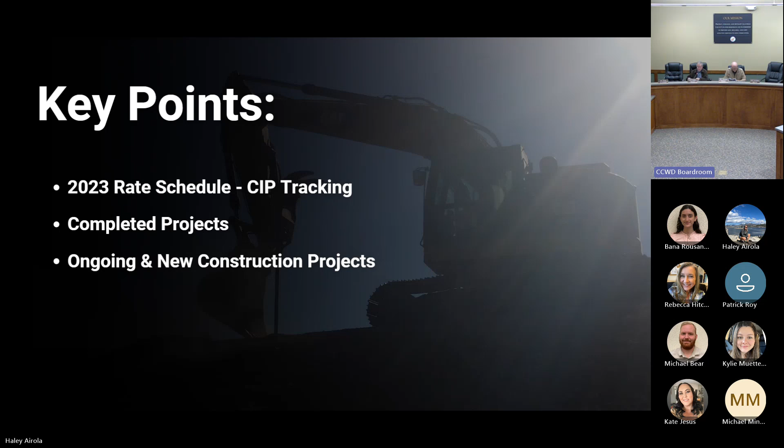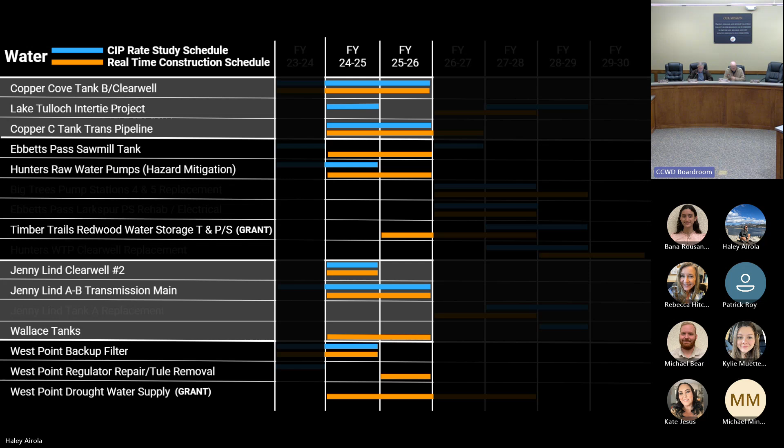And we're focusing on this last year and this upcoming year for this CIP discussion.

So then here's the projects that are in the CIP now that are finishing up. We've got the Jenny Lind Clearwell, it's scheduled to be online here in the next couple weeks. The West Point backup filter, so that's where we're at. And then the Copper Cove tank B and Clearwell are going to be nearly complete.

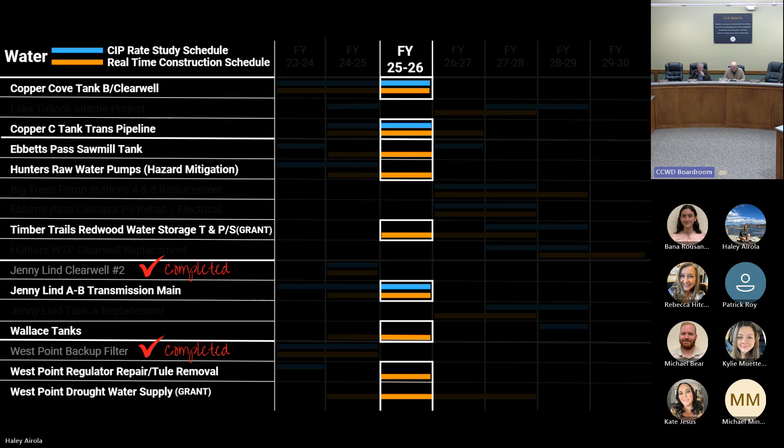So on the sewer side, we're going to compare that to what we got in the 2023 rate schedule.

So the Arnold, the reason we're behind is that we decided to try to seek a grant that became available. We're getting close to the USDA loan grant, we're working through the financials with the USDA to finalize that.

I just think we need to make a point about this, something that happens to us all the time, unfortunately, we sometimes have to shuffle a project because we know funding is going to be available for something else. This is never a 100% deal because you can't see too far in the future, but maybe you could explain that, Mike.

I was actually just going to make a comment here to slow it down a little bit, because Kevin, this is awesome, I really appreciate what you've done here. And I know we're not into dollars yet, this is just timing. But I think it really helps show, compare what the original plan was to where we're at. I also want to reiterate, this is not unusual to have this kind of change from a construction schedule from what we had started 2 years ago to where we are now.

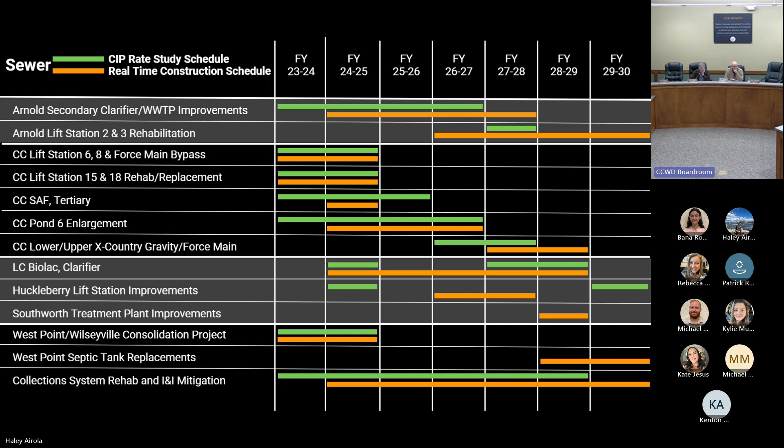So here's the projects that are in this existing fiscal year and next. You can see there's a couple projects that we completed, at the board meeting yesterday with the project completion stuff. So on the lift station project, everything's kind of moving along there.

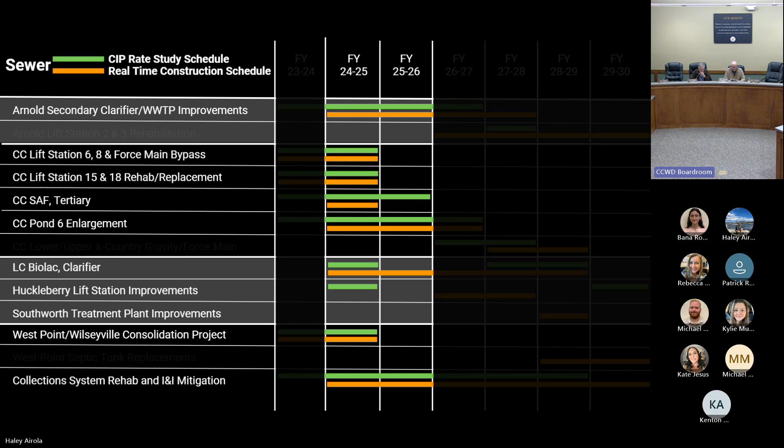So these are the West Point, Wilseyville consolidation projects. They just have a few more tasks up there, and we'll be done there also.

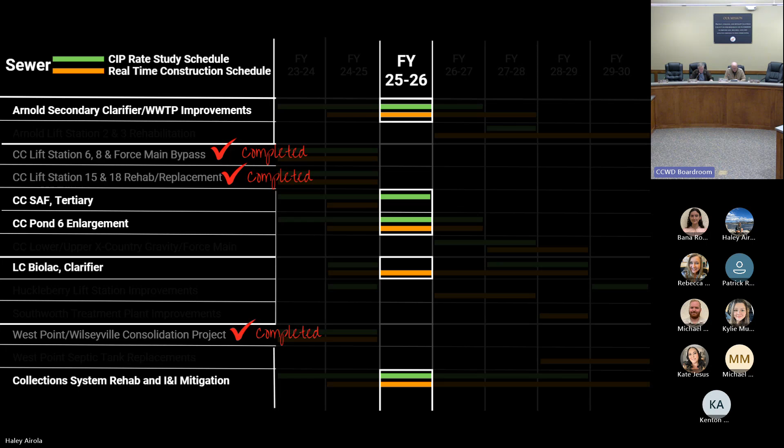So here I'm going to go through the projects to be completed in this fiscal year.

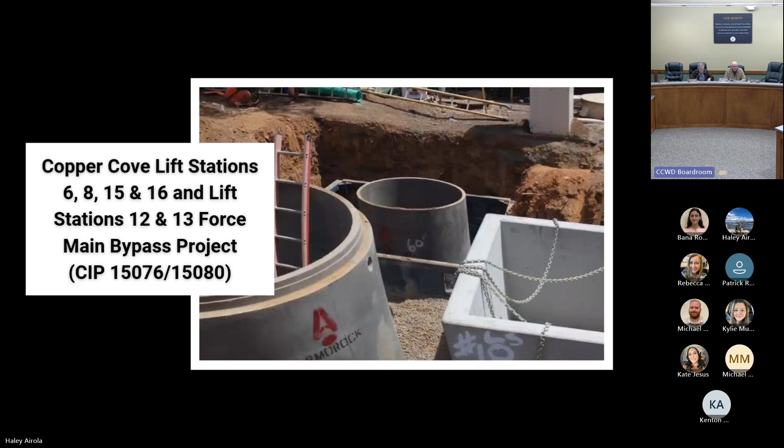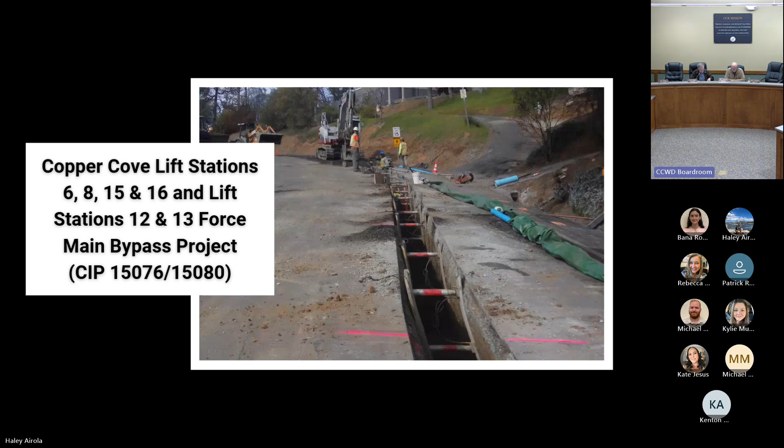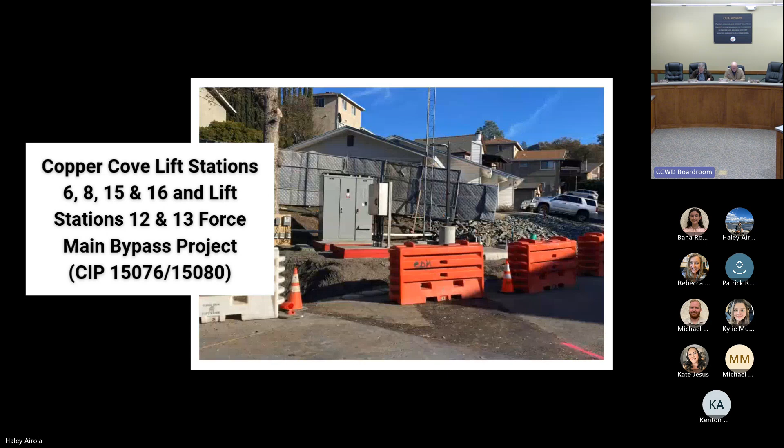So we got the Copper Cove lift station project. This is a project that we brought to the board yesterday for final acceptance. This was replacing the 4 dry can lift stations with new Armorock polymer wet wells and new submersible pumps, new electrical components, and the force main bypass. This was a really good project. It had a lot of delays in the construction process due to material deliverables, but in the end, it ended well.

This is the Jenny Lind Clearwell project. This tank's ready to go online here in the next couple of weeks. They plan on coming back next week to disinfect it, and then we'll fill it. This was a rehabilitation of the tank, and not only rehabilitation, there wasn't adequate freeboard, which is the level of the water between the roof and the water level. So if there's an earthquake, you get a sloshing effect that could damage the roof. Part of the project was to bring this up to current standards and raise the roof. So we got a new roof, floor repairs and recoating, new spiral staircase, and a new blower system to help with the disinfection byproducts.

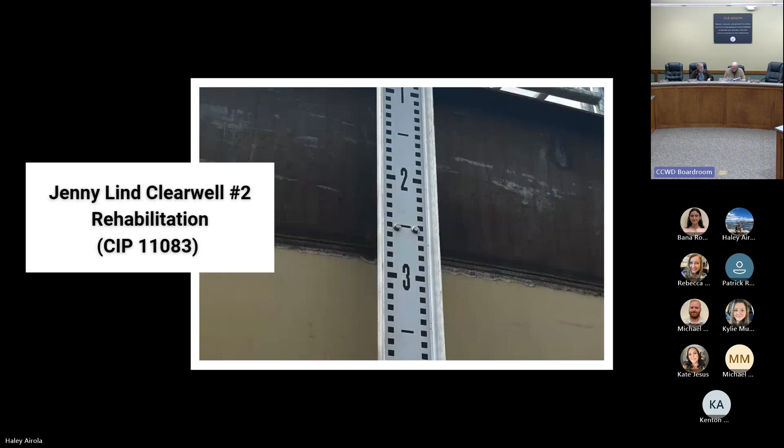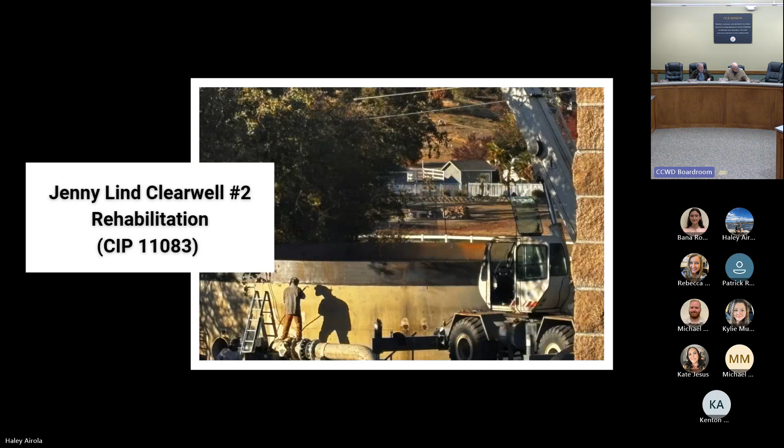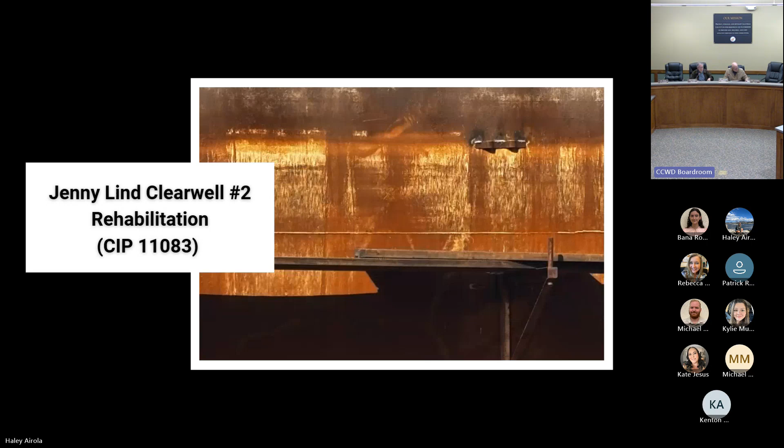Kevin, do you have 2 clearwells there? Yeah, there's one Clearwell 1 that's just next to this Clearwell, and that was rehabbed about 10 years ago. So that's similar, this tank was a similar rehab with the new roof. So we quite clearly couldn't have done this repair unless you had an existing side-by-side clearwell. Yeah, we had to do it in the non-peak season. Normally we'd like to rehab these tanks in the summertime when there's nice weather, but because demand's high in the summertime, we could only take this tank out of service between November and May.

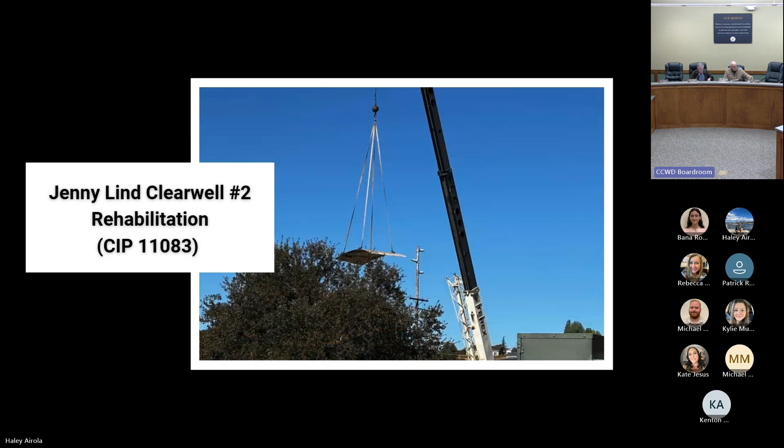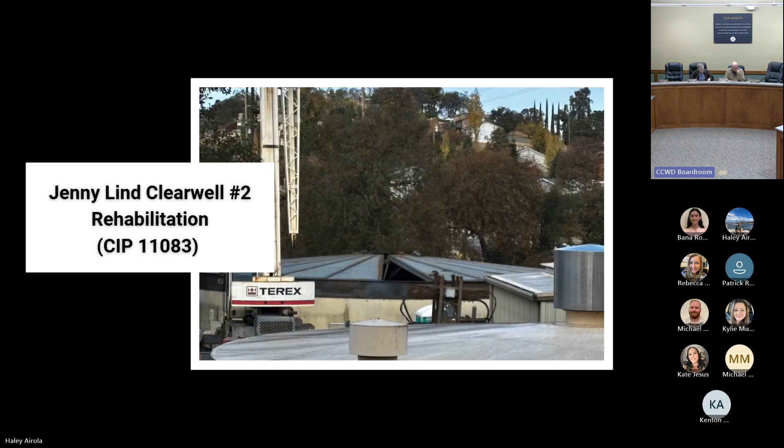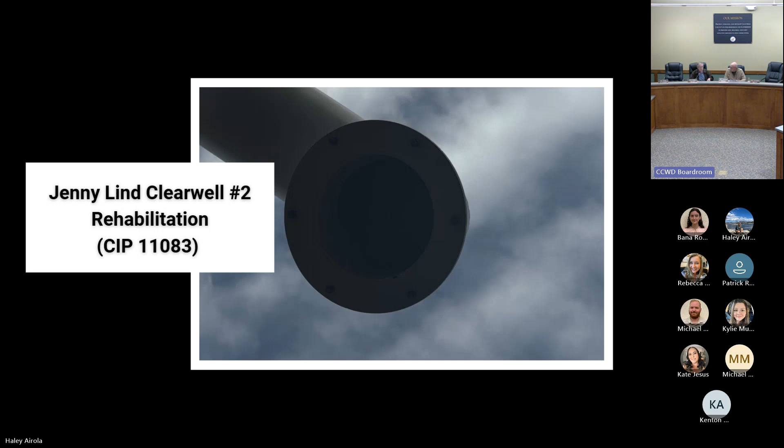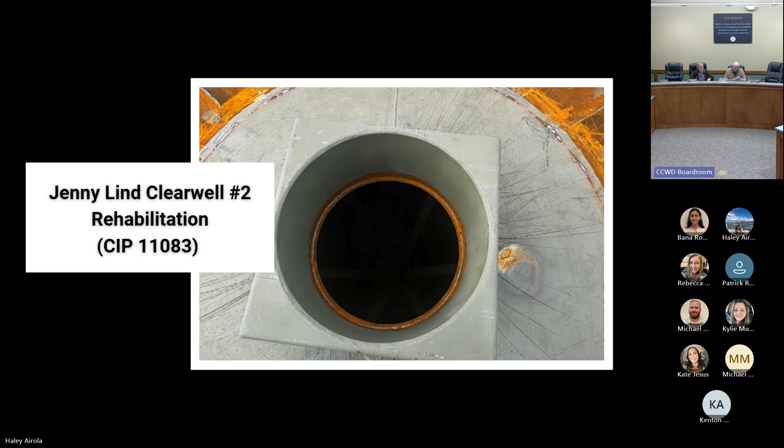So there's a couple different projects within that project. Right now we're procuring the DAF unit, which is a pretreatment. We need that in order to dewater the pond in order to start construction. So the first stage is to get the DAF unit, which gets the algae out of the water so that we can treat it up. It could double the capacity of our existing tertiary treatment plant by just being able to pre-treat so the algae doesn't clog up the filters. Also with that, we'll have to do a filter rehab on the existing filter along with that DAF upgrade. The second phase is increasing the capacity, the enlargement of the dam or the pond. The third phase is the tertiary treatment upgrades, which is new filters at the treatment plant and a new UV, so that we can get enough capacity through there to maximize the treatment process.

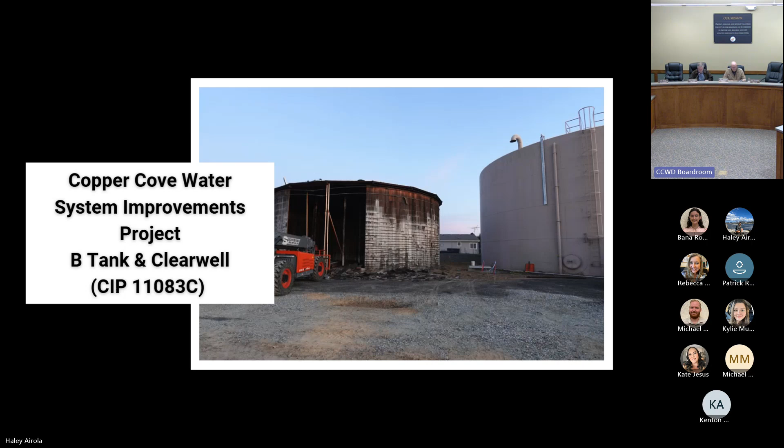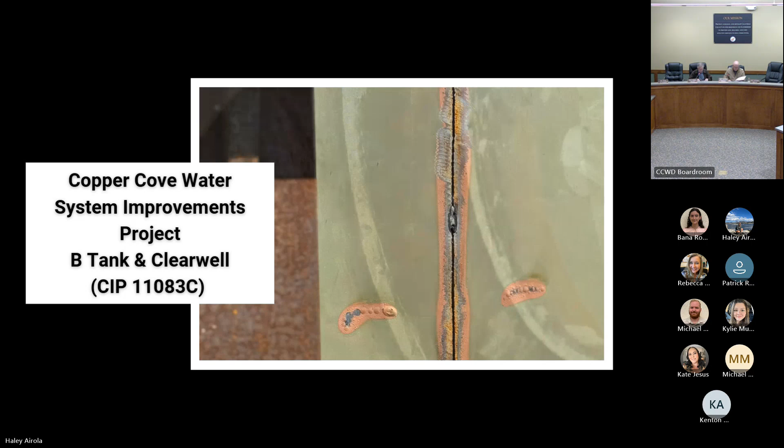The next project is our Copper Cove water system. This is a B tank. We had a redwood tank there that we took down and put a new steel tank in, and it's constructed online. The other tank, we lowered the roof to match the new tank level and rehabbed it. That should be ready to go online here in the next month. Then the clearwell, next week we're putting the first new clearwell online down at the water treatment plant. That'll be online the 19th, I believe. Then we'll dive into the existing clearwell to rehab that one. This should be done close to the end of the fiscal year, maybe a little bit into the next fiscal year.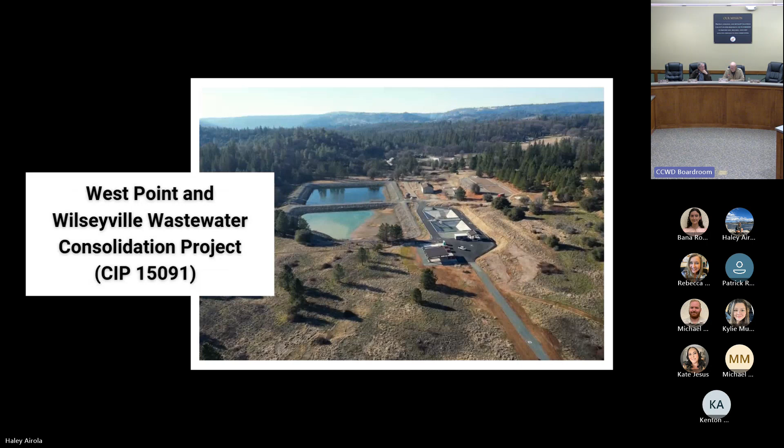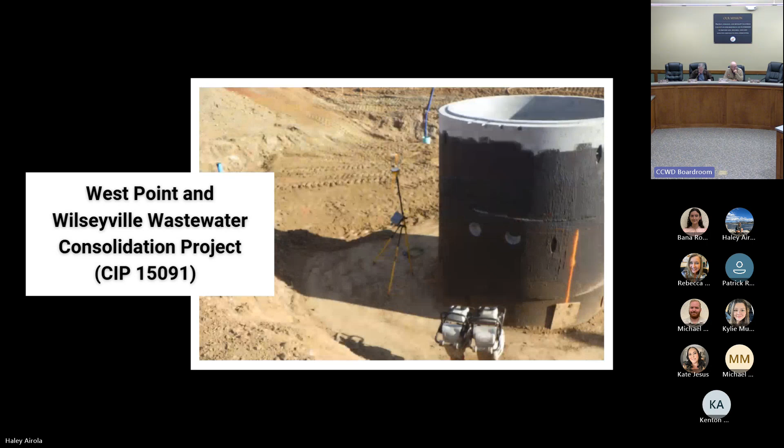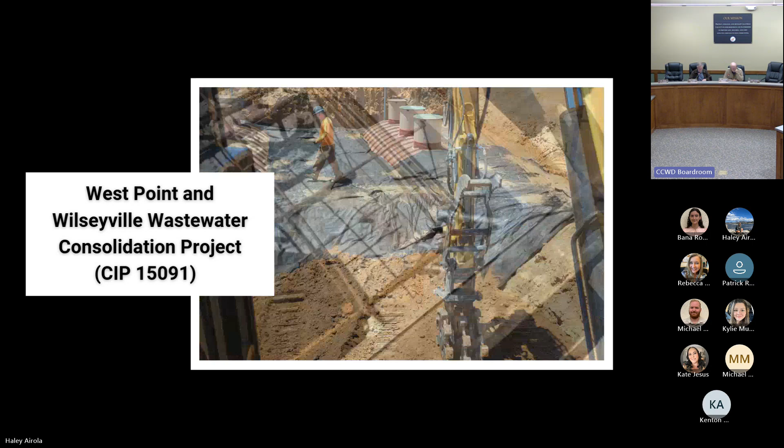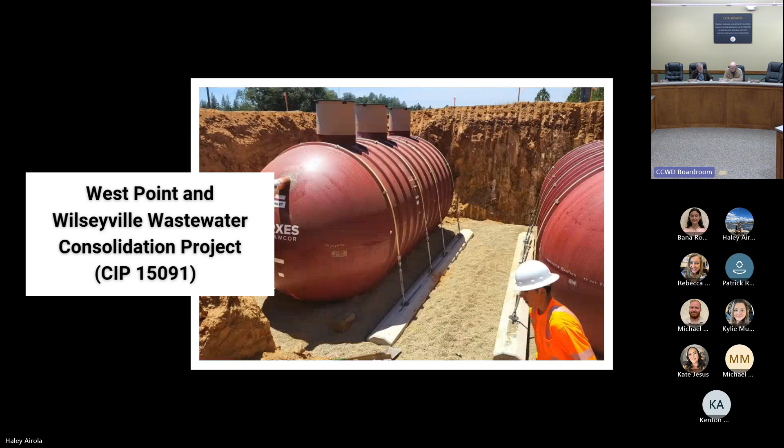So we got the West Point, Wilseyville consolidation project. This one also had some delays with electrical components and that type of stuff. They're pretty well done with the entire project except for the electrical equipment that just showed up last week. We're trying to get that installed, and then they'll go clean out the old Wilseyville pond. They'll de-water and take all the solids off site, and they'll send us the water through the new septic tanks here. That consolidates and eliminates one of our wastewater treatment plants, which is really good for permitting and that type of stuff. It was all grant funded, disadvantaged community, state water funds.

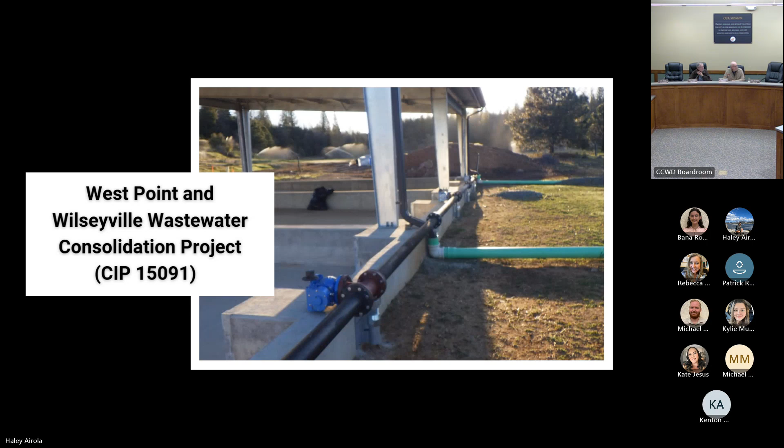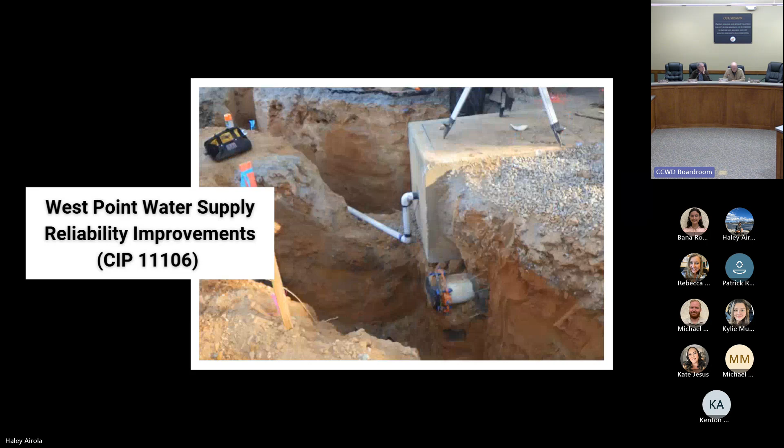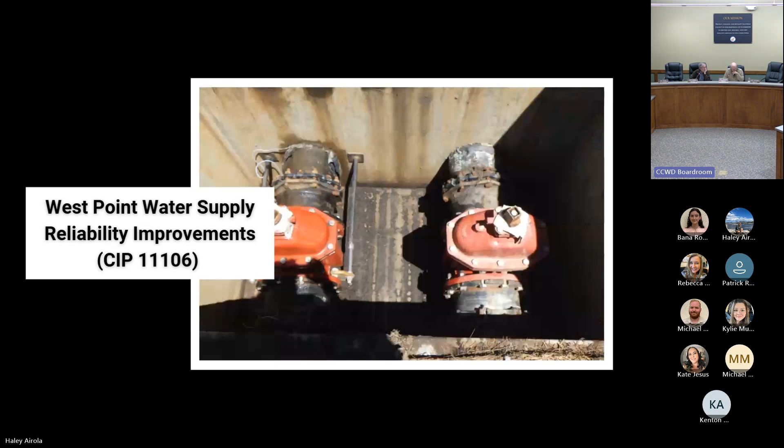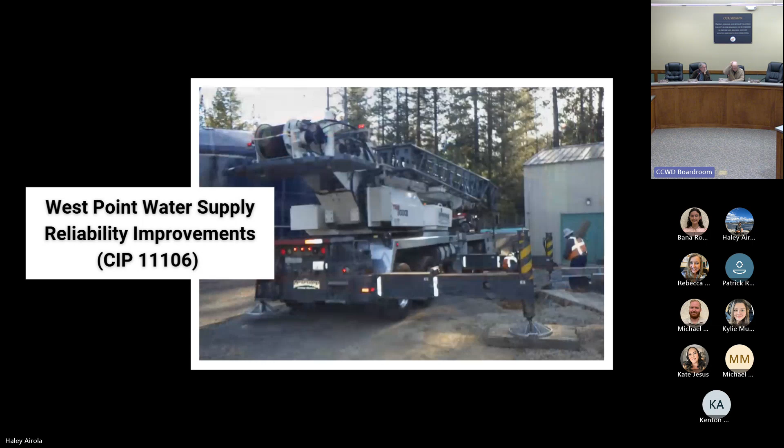So this project here is the water supply reliability improvement. This is the secondary filter at the West Point water treatment plant. Before this project, we only had one filter there, so there was no way to do any service or maintenance on it. Now we've got a second filter with all the high-tech equipment involved, and a new building for it to be inside of. It's a really great project, also funded in part by grant funds from the IRWM.

So there, KW Emerson is pretty well done. They just have some old tank that they have to take out and a couple of repair items in the buildings.

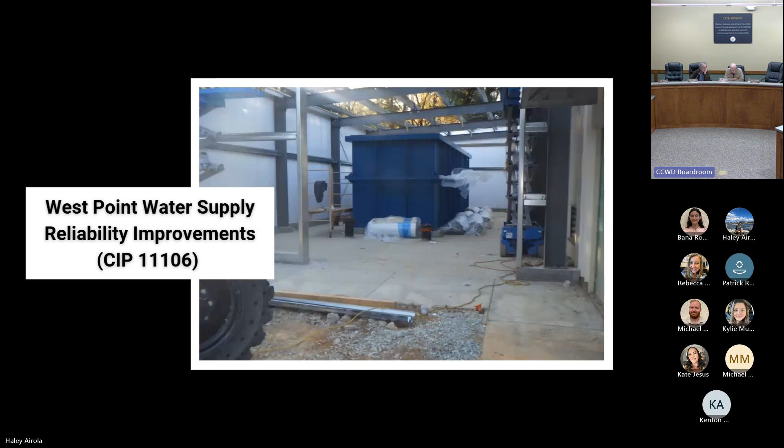So the AMI project, this one's been ongoing. I think they were substantially complete over a year ago, but we've just been trying to work out the final process of the project, and also there was available grant funds left over. So we got permission to close out the construction project and not lose the grant funds. We're able to close out Mueller's portion of the project.

We'll probably bring it to the engineering committee, hopefully with the plan of using this other $1 million that we have. We already brought it before and discussed some of the flow monitoring equipment that Mueller has available. There's also Cla-Val, another company that makes the PRVs. They also have equipment that we can use to retrofit some of our PRVs with flow control equipment and pressure equipment.

It's going to really help us understand things. We can see what flows go into what zones and compare that to the consumption meters in that zone, and really dial in our system. It can control the pressure by putting pressure sensors out in the system that would control how you operate the PRV, so it can maximize performance, because the PRV just senses pressure at the PRV itself, but if you're trying to control pressure downstream in the system, it's a lot more high-tech and you can get a lot more information out of it. So there's a lot of advantage to that, and if we have grant funds for it, it could be a wise investment for us.

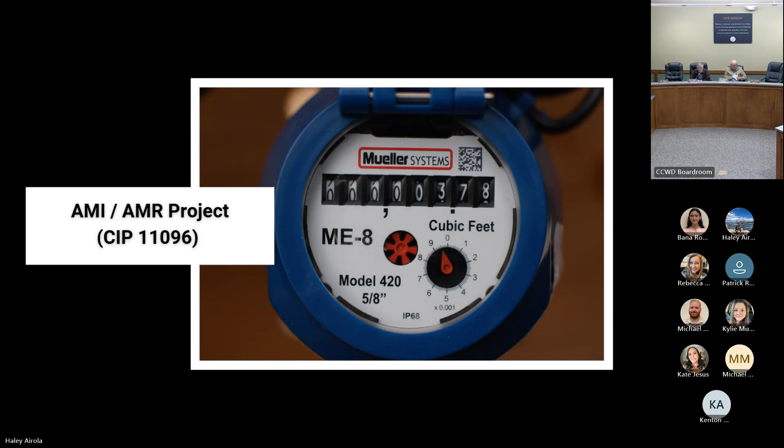So that's kind of the projects that are finishing up in the construction phase. Now I'm going to talk about projects that have already been designed or are close to design completion, but will be going into construction in this next fiscal year.

So we've got the Jenny Lind A to B project, DA Woods is working on that. They're shut down right now, but we expect they'll be back up and running in the next couple of weeks. This is the 14-inch transmission main that connects the A and B tanks in the Jenny Lind service area. It's going to be a really great project when it's done, because we'll have a more dedicated transmission line. You won't have the pressure problems that you currently have in the Jenny Lind water system.

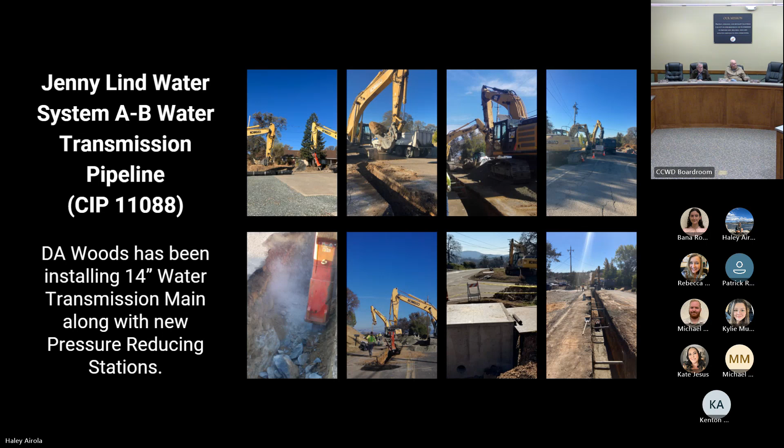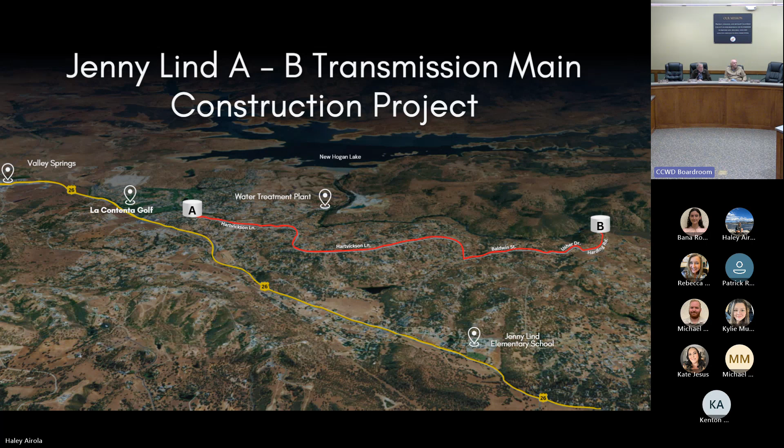So this alignment here, A to B - a lot of people here have probably seen the work out there. We'll have a bunch of PRVs within the system, so the transmission line will be feeding the PRVs, so you won't have those big pressure spikes.

So for other projects coming online, we talked about the Arnold wastewater secondary clarifier improvement project. That's at our Arnold wastewater treatment plant. Right now we only have one clarifier. This project adds a clarifier because the existing one is on the verge of failure. It also adds digesters to the system because our current digesters, which settle out all the solids, are undersized for the plant.

So the Copper Cove C transmission line project is out to bid right now. This is 12,000 feet of 20-inch ductile iron pipe that goes from our water treatment plant in Copper and feeds the C tank, which is the higher tank up on the hill. Right now there are 2 booster pumps that pump up to B tank, and then a small pump station that pumps from B to C, since C is above B. This project will eliminate that pump station at B, which is outdated and undersized.

So we're adding a 3rd pump at the treatment plant, with new electrical gear to handle that pump. Then we'll pump to C tank and feed the entire system by gravity. So we'll go to B tank, it'll gravity feed, and then from B tank it goes underneath Lake Tulloch to Poker Flat.

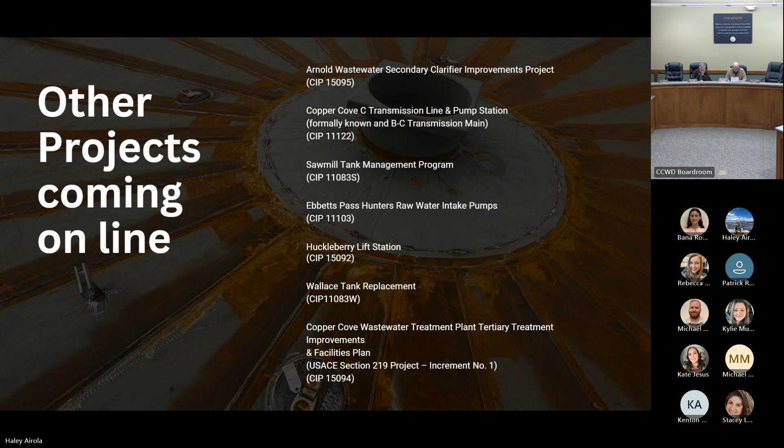So here are pictures and overviews of the projects we talked about. Here's Arnold, the digesters and the clarifiers, that's our existing facility there. Here's the second clarifier and digester we talked about, which is going to be put right next to those.

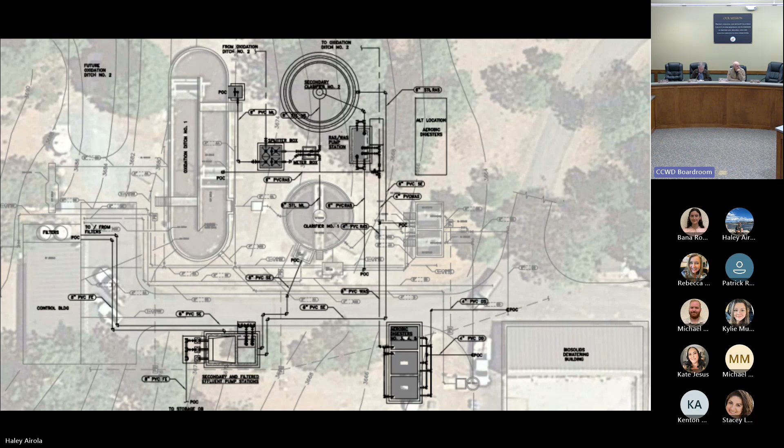The C-tank transmission line, that's the transmission line going to C tank. Here's the layout, it goes down Little John Road and then up the hill, across country to the tank.

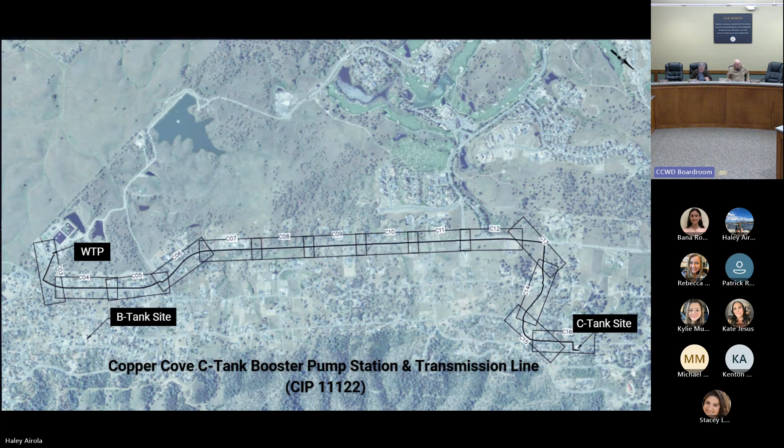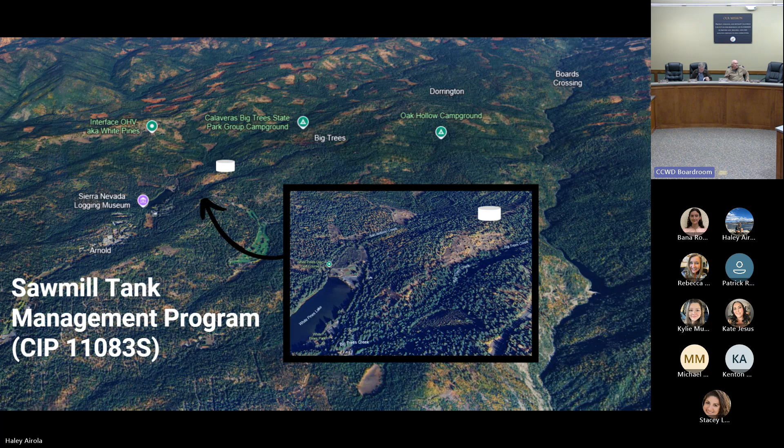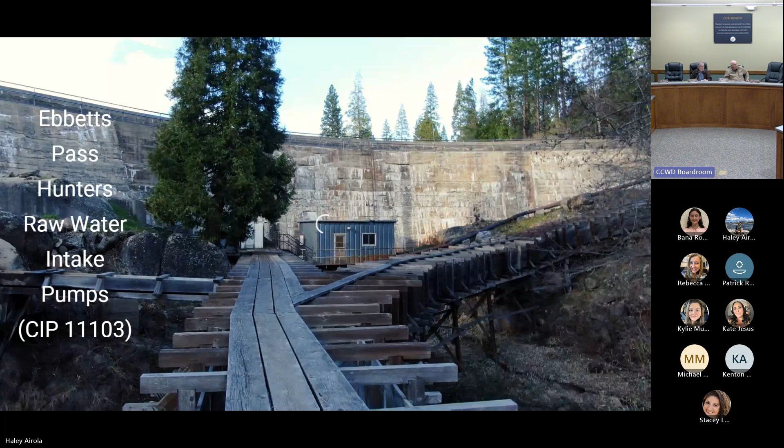And then here's Hunter's raw water intake. We talked about the pump station at the bottom of the dam. There's the pump station down there, and you can see to get to it you have to walk across that. So when it's icy and there's four feet of snow there, it can be a challenge.

Is that whole project still three lots there, or? Yeah, we still have, I don't know, there's three lots. We have the lot next door that was the old treatment plant lot. Originally there were three parcels given to the district for building a new treatment plant. It was quite the bargain.

I know there's this lot, and there's probably an acre and a half there. We haven't expanded that footprint, we're all good on the footprint. We're going to build a little bridge between the two lots so you could drive between them. That used to be, a long time ago, our treatment plant there, and then they built the Huckleberry lift station to pump up to the top of the hill.

So the project's in design and development, so we got the La Contenta Biolac and clarifier. This is at the water treatment plant, or the wastewater treatment plant.

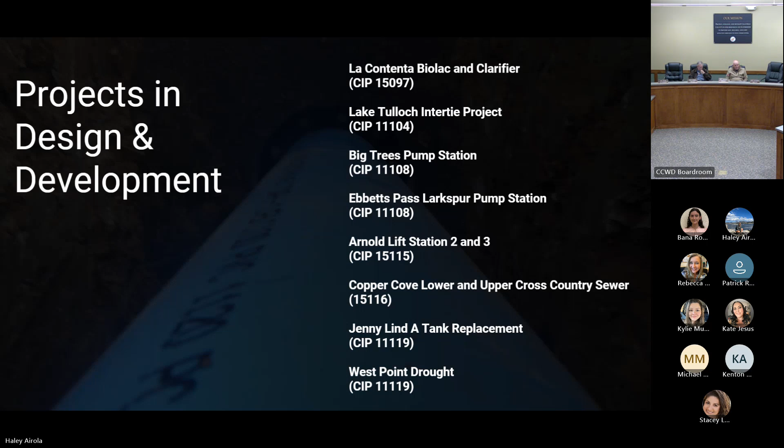So here's kind of the CIP that we have laid out. All the projects in yellow are what's changed from the previous year - either the schedule or the cost changed a little bit, or projects were added. Let me grab one I can see better.

Starting at the top, the Copper Cove tank - we had that finishing this fiscal year, but I don't think they're going to be quite done. So we moved a little bit of money. It didn't increase the cost, but we just moved some money over to the next year, so we'd have money to finish the rehab of the clear well.

The Lake Tulloch Intertie project - we just got an estimate for the project, so we changed the cost and the timeframe. This one had it starting earlier, but this project can't start until the C transmission line project's complete, because they're interconnected. So we moved that out a couple fiscal years, or one fiscal year, and spread out the cost.

The next one's the sawmill tank that was on the CIP, so we just updated the cost to the estimates that we have.

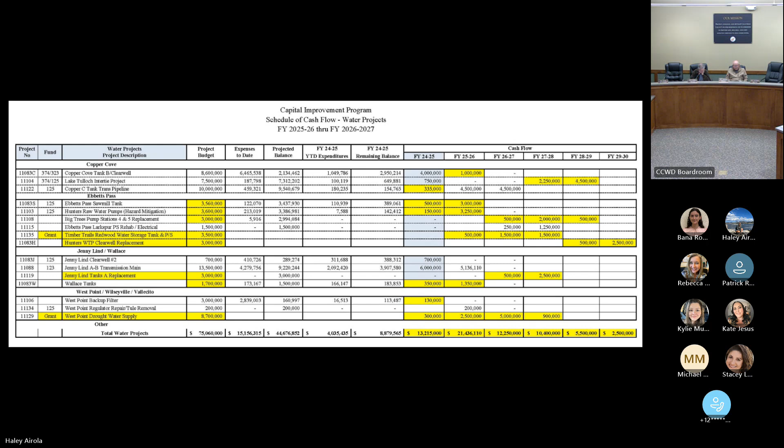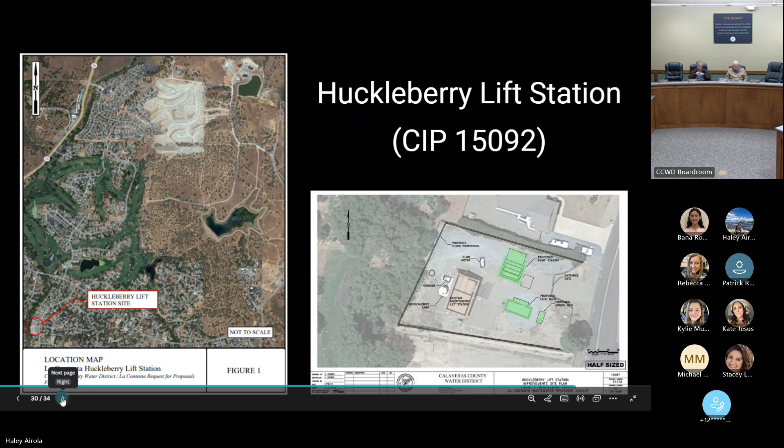Okay, so we'll jump to the sewers, CIP here. Something else is gonna add. Well, if I remember, I'll go back to it. Okay, so here's the...

Kevin, there was one other thing I wanted to ask you about. On page 5, you have a spreadsheet with 15 or more projects that says the projects listed below have been removed from the CIP list due to completion, not meeting CIP budget criteria, or project is no longer a priority. So there's nothing to identify which reason applies to each.

Yeah, so the auditors went through our CIP program and found these projects that had been set up and money was spent on them. Some of them haven't been closed out. The Redwood Tanks, I know that, but a lot of these other projects haven't been closed out.

So Redwood Tanks was grant funded. Was that? Yeah, Redwood tank. So that would be in our CIP, is that the reason, something like that? Yeah, we had a 25% share, so it was on the CIP, but yeah, that's still a CIP project.

I'm trying to think of an example of one that was pulled off. Was it West Point SCADA? Yeah, they said.

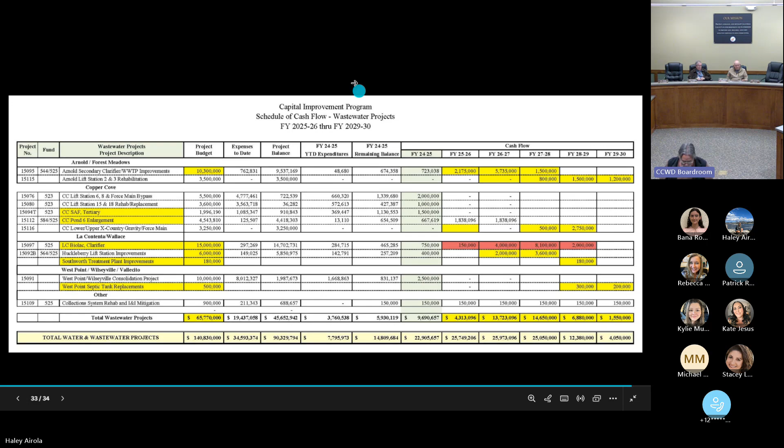Yeah, so the coatings on tanks are good for 20, 25 years maybe at the most, and most of our tanks are already 50 years old or more. So they've outlived their lifespan on the recoating. We have, I think, 30 tanks total, if I remember correctly. Maybe it's 27, I think that's right, around the district.

So there's 12 on the pass. And I think 5 of them were Redwood until a few years ago, replaced as part of a FEMA grant fund project to replace Redwood tanks with fire-resistant materials, which is great.

And then a lot of these tanks are just at that point in their lifespan where they need to be replaced. So what you can anticipate, like Kevin says, the coating is 25 years. The district's approach for tanks that are coated is to address that coating, replace that coating, rather than have to replace the tanks. You get 50 to 60 years out of a run tank, and that's why he talks about having 2 tanks rather than 1 tank.

So we find ourselves in the predicament of how do you take a tank offline when it's critical and you only have 1 tank? Well, that's another problem of the past. They designed all these big tanks that have problems with disinfectant byproducts. Also, the smaller tanks circulate better. So the smaller tank is more of a modern solution than these big tanks that don't have a lot of circulation. So there are other advantages to switching this out.